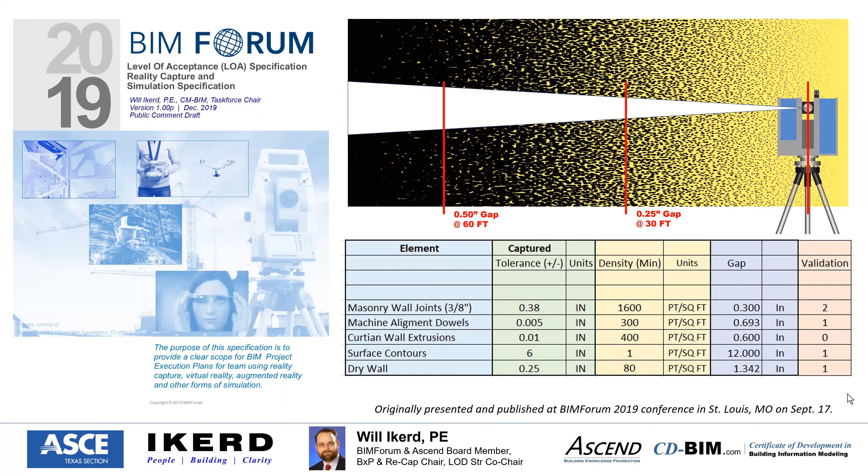When we look at reality capture, I want to mention that the perspective of the specification is brought together both from those in design, in civil engineering, structural engineering, architecture, mechanical engineering, as well as those in construction. And some of the vice chairs on the committee with me would be Alan Sonoha with Turner Construction and Mark Epstein from Sundt Construction, as well as feedback from other national organizations.

When we look at the concepts of reality capture, you think of the adage where people would say you have to see it to believe it. And additionally, we've heard measure twice and cut once. And what we're going to see as this technology advances in the built environment is that projects using reality capture are going to continue to expand. The capabilities of reality capture will continue to grow, and the costs of deploying it will continue to decrease.

We've, at my firm, been utilizing this technology for over 10 years, and that's been consistent throughout that time period. We leveraged this technology from other industries such as aerospace and manufacturing and began to apply it to the built environment. And we have seen that the capabilities of the tools keep getting more advanced while the cost points for deploying that technology reduce.

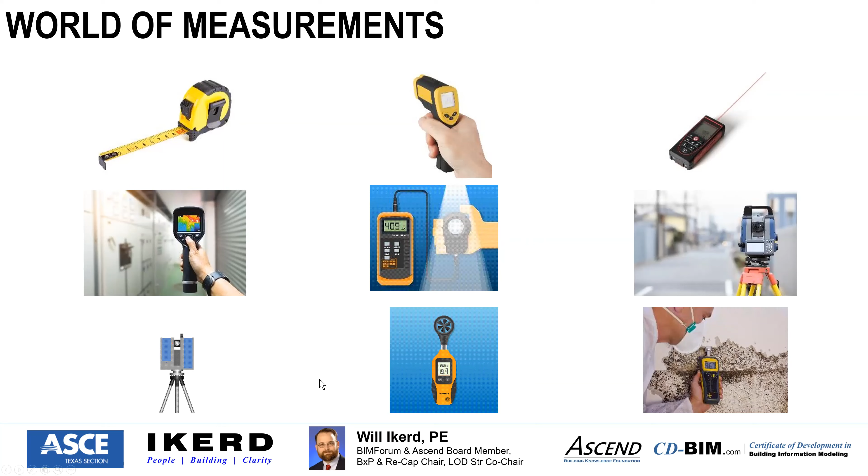Additionally, we want to think about large data. Reality capture is literally all around us. Some of you may already know this, but in the NFL, all of the major football stadiums have RFID tracking sensors around the upper decks throughout the stadium. And each player has a minimum of 2 RFID tag locators in their shoulder pads, one on the right, one on the left. Linemen have 3, one down lower in the spine of the pad.

It is taking over 180 billion bytes of data, real-time tracking, over 31 stadiums, 2,500 players. And they can not only know the speed of a runner, but the direction that this runner's shoulders are pointed. Each football has 2 of these tags in it. They not only know the velocity of the football, but they can tell you the spin of the football as it's looking at both of those tags inside the football and their spatial position as the football is thrown. And the volume of data is really kind of staggering when you think about it.

This is reality capture. And what I would submit to you is that the projects we work on are far more important than a game. And what we're going to see in the built environment, not today, maybe not tomorrow, but these volumes of data sets will be very, very common when we start to think of projects in the built environment, both of what we might call horizontal BIM or civil infrastructure type modeling, as well as the vertical environment of traditional buildings that we might think of.

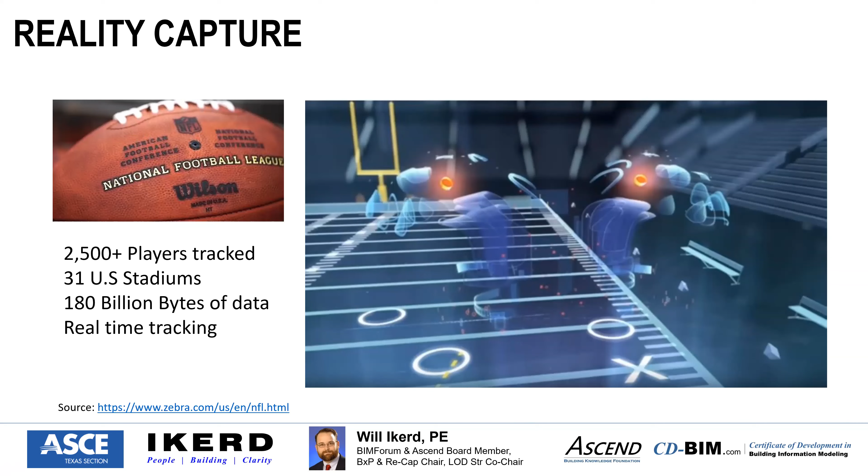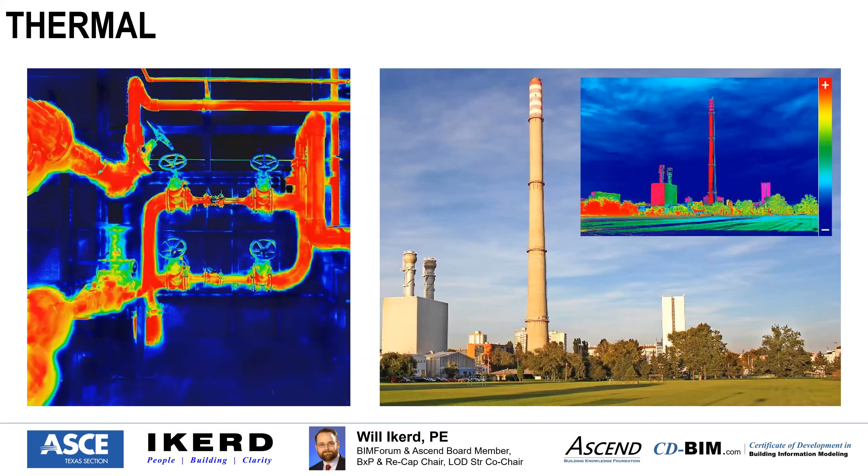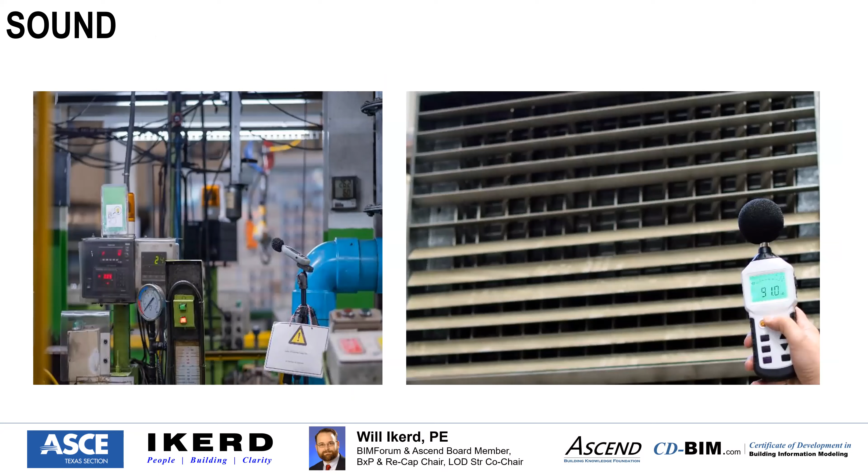Thermal and imagery. This is another aspect of reality capture. And one of the things we're going to talk about in the spec of reality capture is this concept of density of measurements. But you could see definitely in the industrial industry where this could become important. Sound measurements. This could be very important if you're doing a road expansion near an area where you're considering sound pollution and how you attenuate those kind of conditions. That's reality capture. Obviously, we think from civil and surveying the concepts of spatial reality capture.

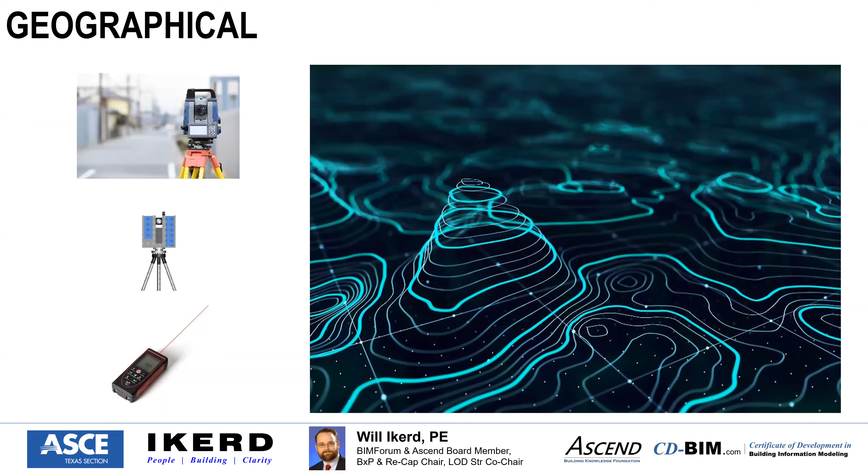And this leads us to where we bring in the concepts of density. One of the things that we look at is that I like to use this analogy of spray paint. When we're thinking about our measurements of reality capture, these could be seismicity measurements. How often do I need sensors in taking those measurements? It could be a robotic total station with a single point and shooting those at distinct areas. Okay, those are going to be points in space.

It could be laser scanning in the cases, examples I'm about to talk about, where I'm shooting up to 1 million points a second. But the question is, what is the density of measurements I need to achieve the goal? And it's not always good to pile in a lot of additional measurements and create a lot of additional points if the file sizes begin to get large and unwieldy. And so we as teams working with owners need to start having this discussion. What are the right amount of measurements?

I have seen some teams try to take laser scanning equipment and create topo surfaces from it. And then what happens is, as they begin to process the data, they start to realize the densities of these point clouds are so thick that they need to do a lot of point reduction to get a TIN network that's even reasonable to work with. The file sizes are really unwieldy. And while they are arguably more precise, I could be the devil's advocate and tell you they're not more accurate. There is this dichotomy and tension between precision and accuracy.

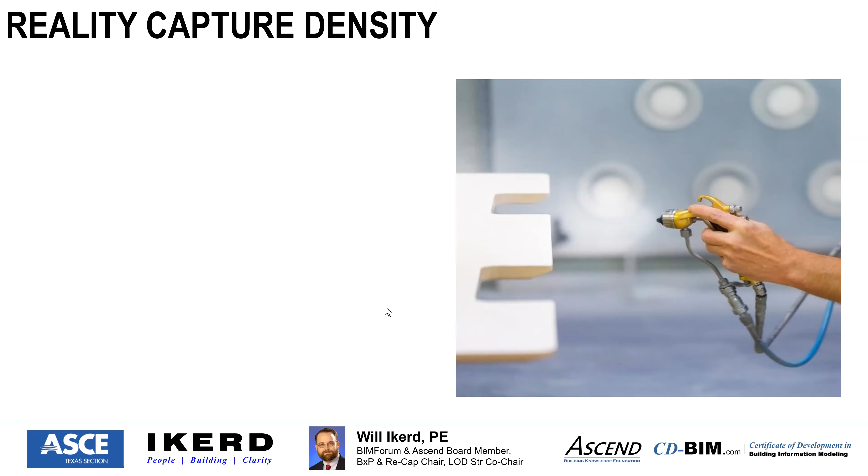So just as if I was spray painting, it wouldn't be a good idea to put on 10 times as much paint as is needed. It would look messy, it would create a mess, and it would be very expensive and wasteful. So just like this spray paint analogy, you don't want less than you need, but you don't want more than you need. And we as professionals need to understand these technologies, understand what reality we are seeking to capture, and going on from there. So as we look at this concept of densities, I want us to think in this case,

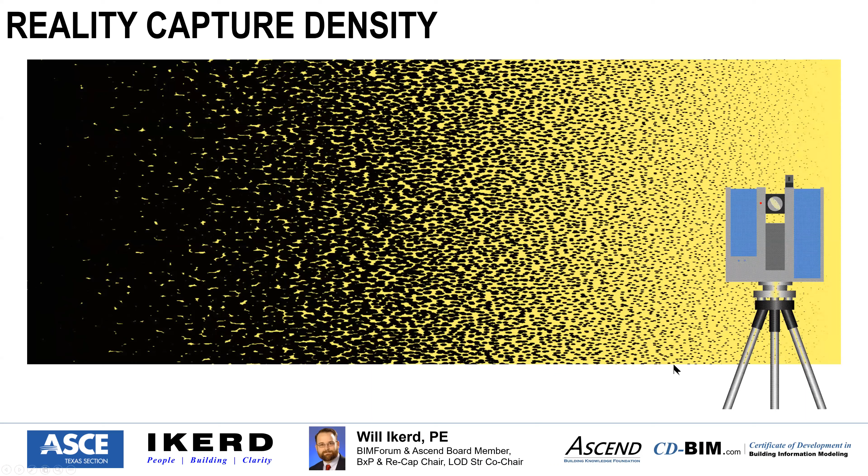light detection and ranging, LiDAR type scanners, and they're going to shoot points out. And what you'll have reported from the manufacturer, some manufacturers will report scan time, some will report densities, and they will report a gap spacing or a point spacing. Depending on the manufacturer, they're going to dictate how they determine that. In this example, I'm saying assume that the manufacturer told you you have a 0.25 inch gap at 30 feet. It's linearly proportional. As you go out to 60 feet, you're going to have a half inch gap.

And what I want y'all to be thinking about is that there's not any setting on the equipment that'll tell you this is your density. They will tell you your overall scan resolution, and that's going to tell you how many points it will shoot out in a certain gap at a given distance. If your object is 15 feet away, then your gap spacing would be 1/8 of an inch. If it's 120 feet away, your gap spacing would be 1 inch. It's linearly proportional. So if I'm trying to measure objects that are very far off, I'm going to have to shoot at a much higher density than if those objects are very close.

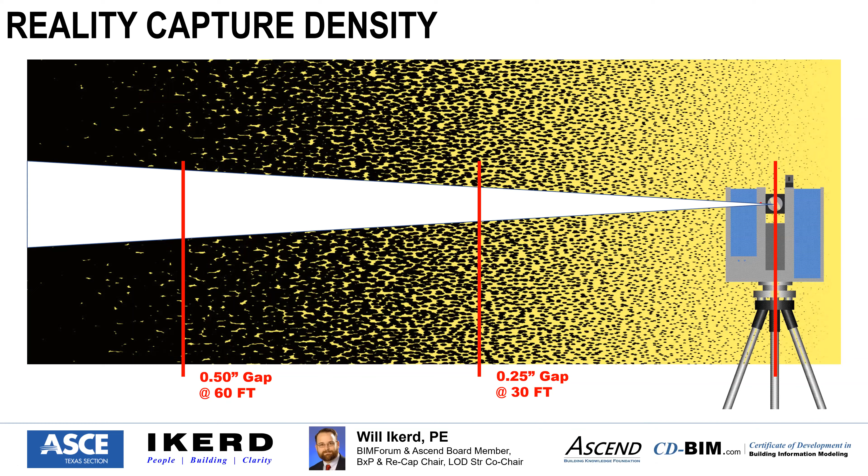So part of the discernment and the engineering that go into prescribing the correct amount of scanning needed for a given task is really understanding this concept of density. What I like about the BIMForum's reality capture specification that deals with levels of acceptance is it goes beyond just accuracy. It's not good enough to read out the accuracy of the instrument. You need to start considering the densities.

If this was other forms of reality capture, you could see this correlation between the accuracy and the units of measurement and the density of those measurements. And you could see this table would vary a lot. In all the examples from here on, we're going to hone in the discussions on laser scanning, but these concepts would apply to other forms of units of measurement for different types of reality capture.

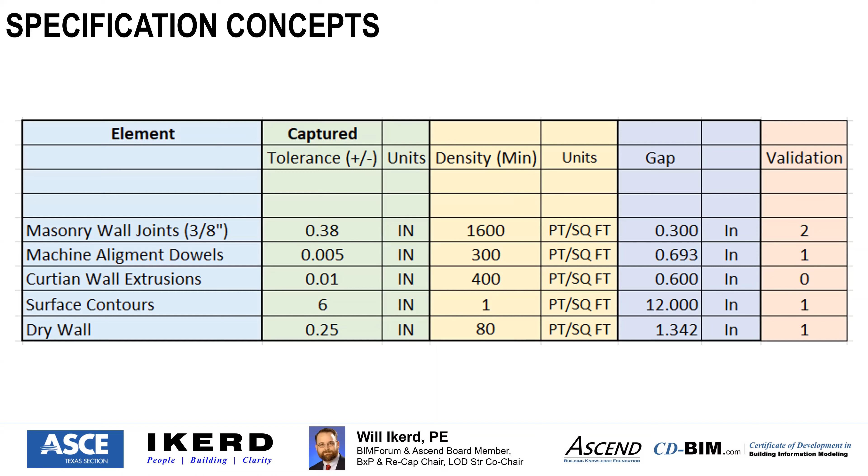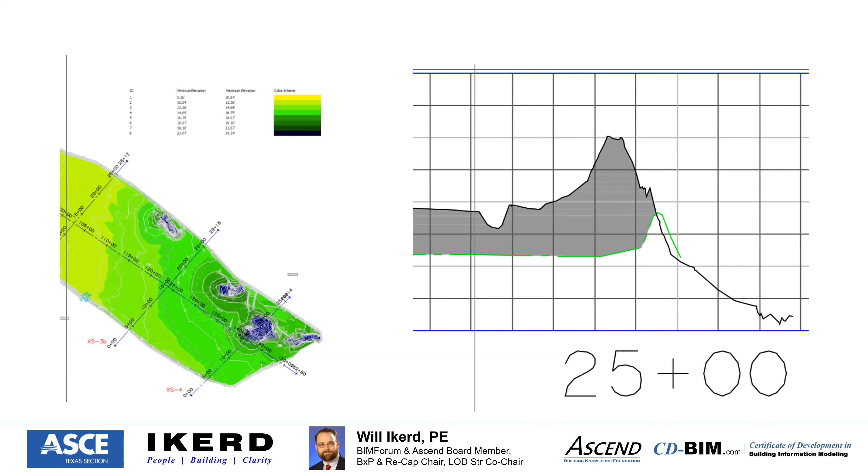So there's not one size fits all. And there's a lot of factors that go into the tolerances. And so we need to start looking at what is the right amount of measurements. In this particular application, the aerial drone created a very dense mesh that had to go through subsequent rounds of mesh thinning, which was deemed acceptable to average out the file size where it was reasonably manageable. I think meshes were opened up to the nearest 3 foot or 1 yard intervals between points.

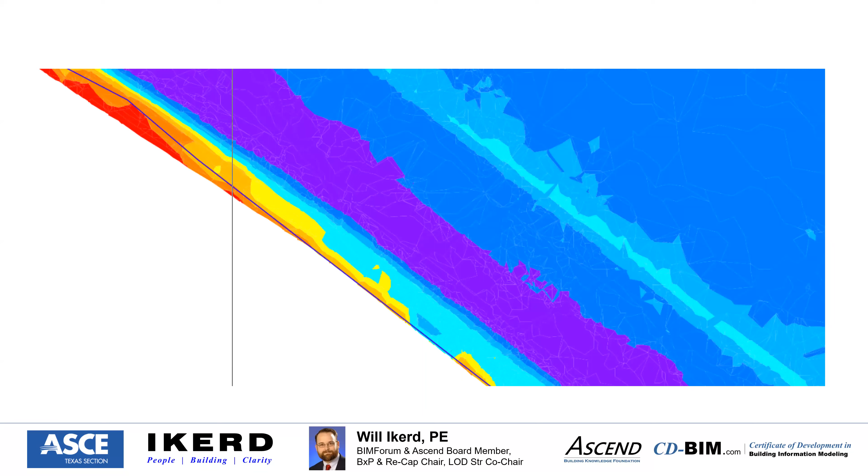And what you do at that point is you're tracking the volumes as you make adjustments of that mesh, and you really are looking at how much the volumes are changing as you start refining or thinning the mesh on that calculation. So in this particular objective, one of the things we deal with in photogrammetry is if there's thick shrubs or other artifacts on the surfaces, that technology can pick up those objects and it will skew the data. So there can be work involved in making discerning decisions about what of that geometry to leave out when it's creating that mesh.

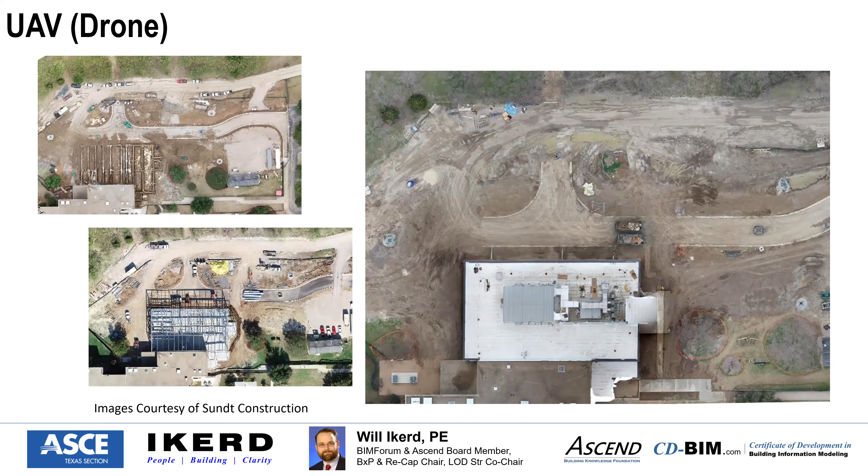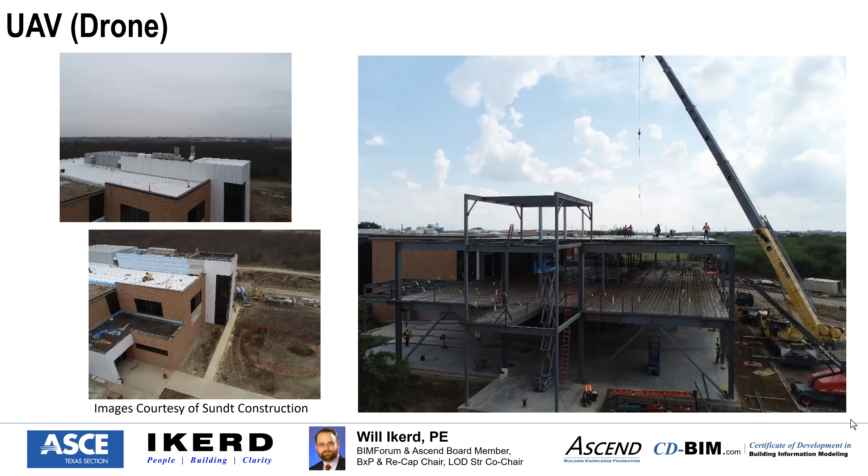With each of these, if you're looking at this presentation, you really need to consult the particular manufacturer specifications on the equipment you're using, and also consider every year that this technology is evolving. But with that said, here the aerial reality capture provides you a good understanding of the status of the project, and that was its function. And so here you would really put densities not applicable. You're not very concerned with densities if you're calling out this type of measurements as you go.

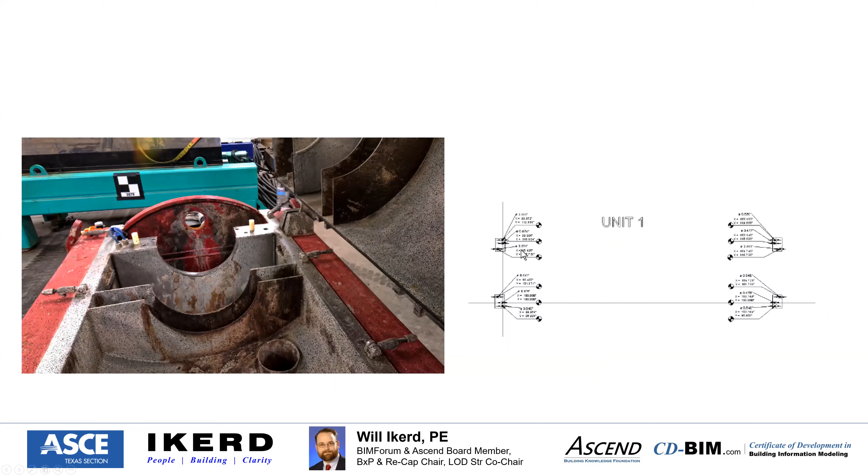These are Delrin machined pins we put in. They show up in the laser scans, but they act as a wayfinder in the models where we will auto detect that sphere that's set into the setting pin socket. Those were machined on a lathe to match fit the sockets of the setting pins. Here you would see spheres used for triangulating and auto-detecting separate scans, and checkerboards are placed in the distances that are also used to tie together separate scans. And here on the back side of the centrifuge, you would see other setting pins that are used to show up in the scan data and serve as a location aid. And from these, we would work out the brackets of where we would place these.

Moving into industrial applications, here you'd see a combination of a robotic total station and one of the laser scanners used in conjunction with each other. Spheres are used to pull these scans from different locations together, and the total station would be used to shoot in points and shoot faces of structural steel to act as a secondary calibration of the measurements.

In this case, this was a rail system used to transport jet engines for testing. And so we were dealing with not only tolerances of the structure, but tolerances of rail alignment as we study those. And the structure overall, in this case, we were doing both reality capture and structural review of the system to accommodate testing of larger jet engines. But these would be rolled on a carrier, just the jet engine itself, into the testing bays.

As we look at that, you see an overlay and synergy from modeling, which would be existing in green, new is in red, this would be an apparatus, and then the point cloud is overlaid with it, showing you the existing railways as they spin off the main and into each bay. So you see a combination of dealing with tolerances, but also we need sufficient densities. We're shooting from the ground very high up. So on this one, we would have had a tighter specification on scan densities.

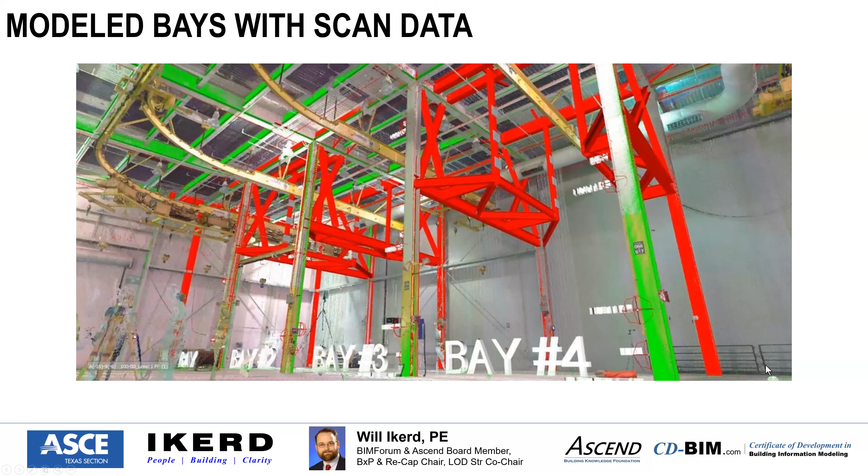Do the spheres have transmitters? Very good question. The spheres do not. They are a calibrated surface, and in some of these scan pictures I'm going to show you, you'll see a bald spot in the scan data. This is where it's directly below the tripod, and the scanner will scan everywhere except directly below itself. So it will scan almost 360 degrees. It'll do 280 degrees over the horizon and then 360 around, and it will pick up these spheres.

And it takes 3 spheres, 3 points to define a plane. We'd like to have more than 3 spheres in any one scan. So when I move the scanner to a new location, it will pick up the same spheres, and the software will be able to auto-detect those and tie those 2 scans together. If these spheres are on platforms that are vibrating, you will get error in your registration. If a technician accidentally bumps the sphere, you'll get error in your registration.

If they're outside and you're in conditions where thermal expansion is a consideration. For example, there's a really long run on a rail line, and we put one of these spheres on the magnetic base. Let's say we were scanning within an area, and 2 of these spheres were each side of an expansion joint. It is conceivable that with thermal expansion, you could start to perceive some error as you're measuring with this equipment.

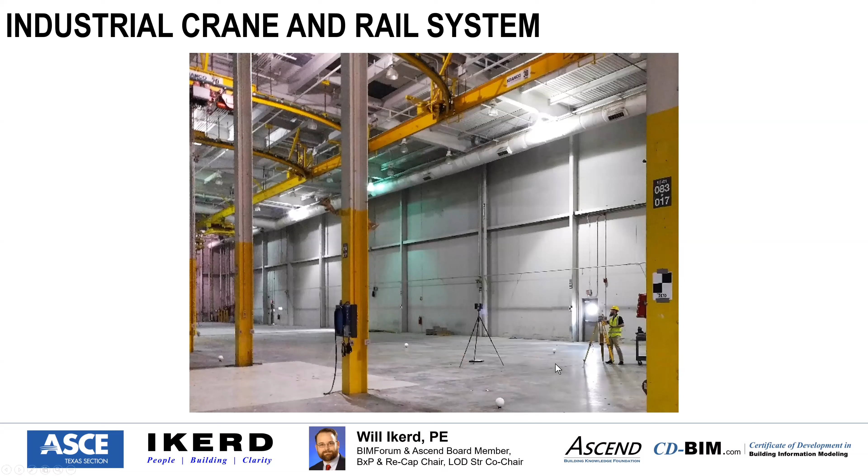As we look at another example, I'm going to shift. This was in Houston. The building's a little over 100 years old. On this one, I was requested to do load capacity calculations. It's approximately an 8-story building. And one of the things I'm looking at is that the steel columns were built up from plate girders. And then they would have large uneven-legged angles, and the long leg of the angle actually turned into a thickened portion of the flange the way it was riveted together.

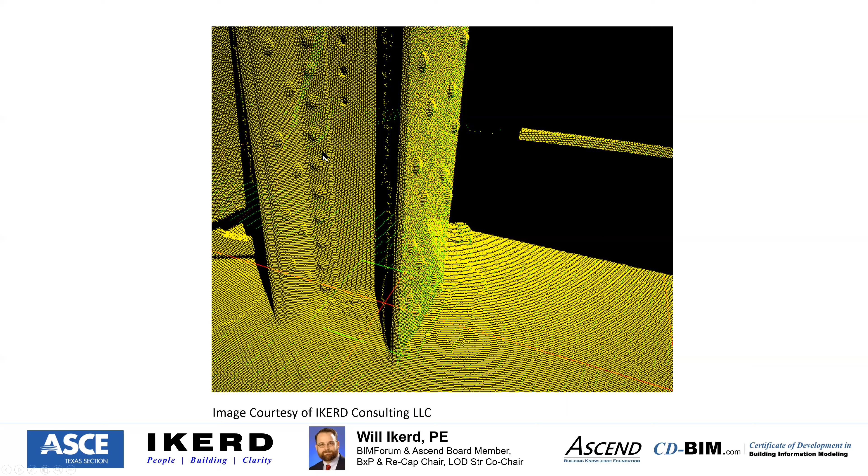So here I'm looking at much higher densities, very tight tolerances, and it does not need to be over the whole project. I'm really just looking at identifying the column locations and the capacities.

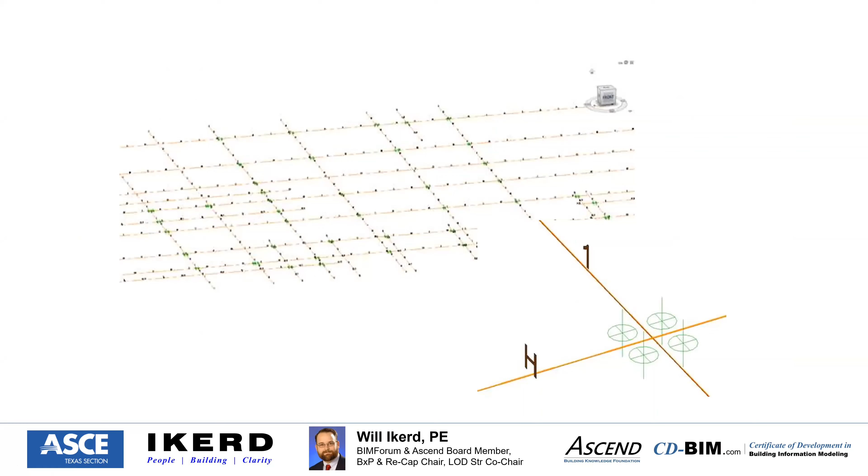So far we've gone through a 20 to 30-year-old jet engine repair shop, centrifuges. We've talked about 100-year-old buildings. This is new construction I'm about to show you. This was on a military base, and here it's been about 3 weeks. This is a pile of structural steel columns fabricated and delivered that they cannot erect. These are scan clouds, not photographs. And so these are point clouds of the space.

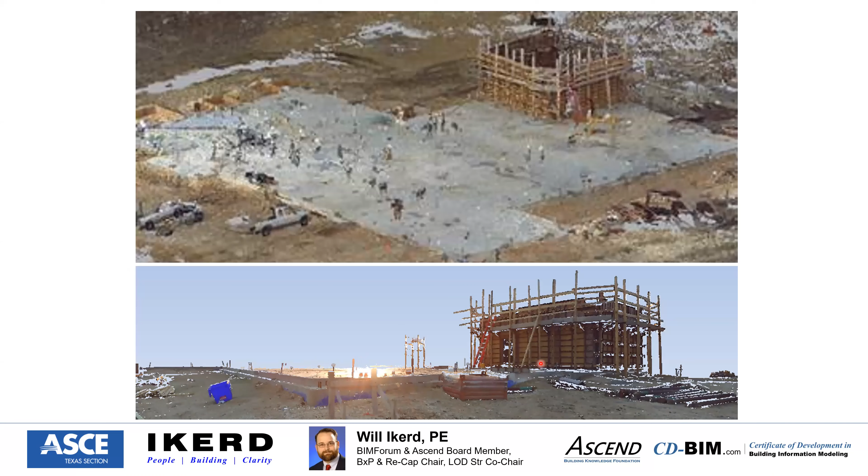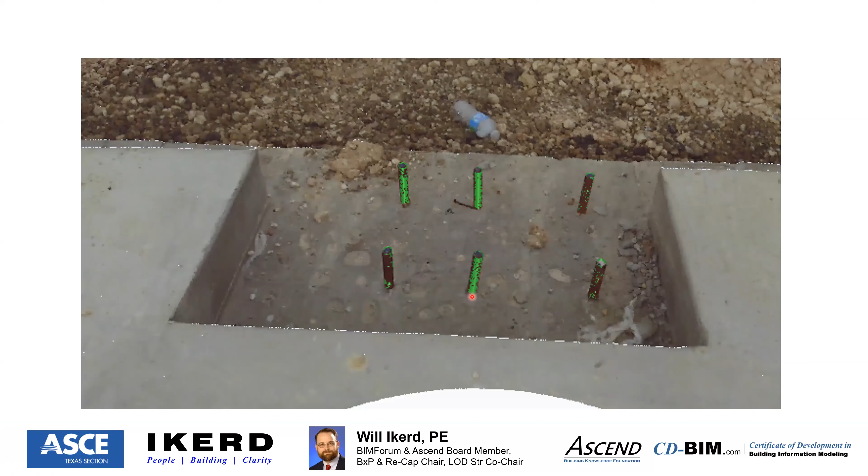Again, this is a point cloud showing the anchor rods. And the green is the auto detection in some extraction software where we're coming up with an as-built of the anchor rods. And so now you start to see the as-built of the anchor rods extracted.

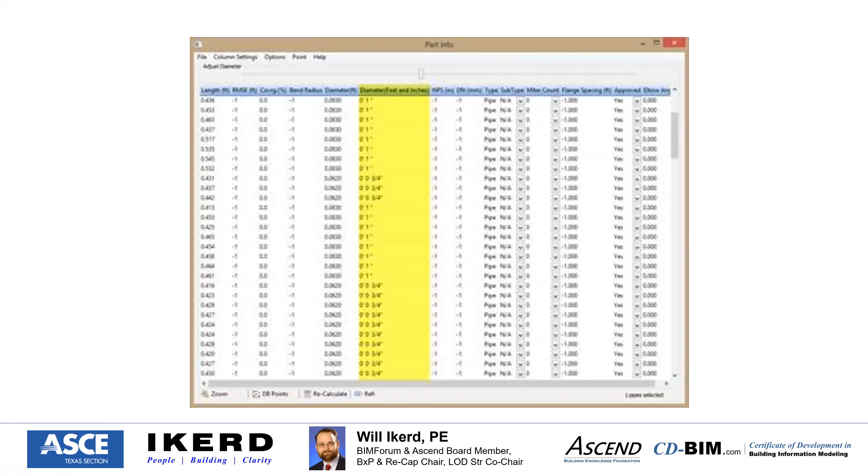And what we did is we calibrated a part library in the software. The software we used at the time of this project was utilized for auto detection of pipes for any mechanical type work. But an anchor rod to the software just looks like a pipe coming out. So we modified the library to look for the diameters that correlated to the anchor rods used on the project.

And what this allowed us to do is, looking at the pattern, we would look at the intersection of the crosses of a pair of anchor rods and say, by definition, that would be the center line of the grids.

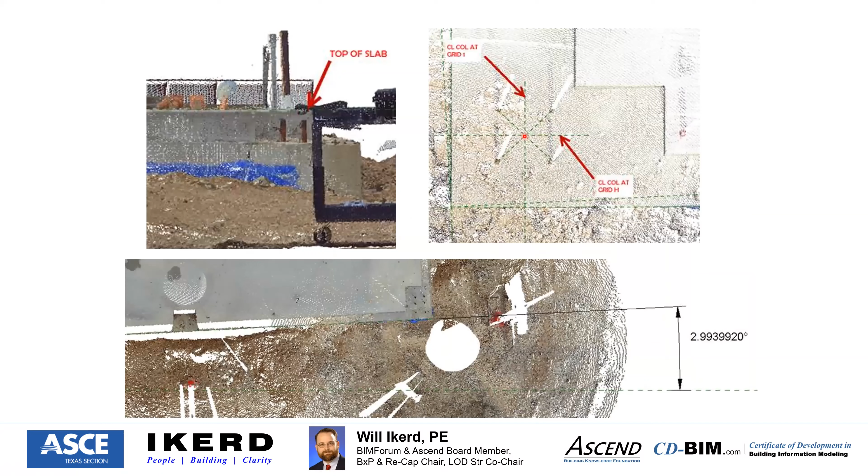And we located the point cloud into alignment with the grids, and then from there began measuring. And not only are some of the anchor rods off location, but they're also skewed. So it's not enough just to know where the top of the anchor rod is, that it's off center. You really have to know, is it rotated and tilting out of plane and out of alignment, i.e. are the rods not plumb? Because that's going to affect how you remedially modify the base plates.

In this case, we did scanning on a Saturday, had information registered, and a layout on Monday morning to review for the client. We also were retained to do the steel detailing modifications. We had remedial base plate templates provided to them by end of day Monday, and they were modifying steel Tuesday and Wednesday of that week. They got special permission from the owner to use plasma cutting on site. They'd previously, by contract, not been allowed to use torching on site.

But it took steel columns that had been sitting idle for 3 weeks, and they were looking at having to ship all of these columns back to the fabrication shop about 6 hours drive away. And reality capture allowed them, one, to understand what the problem was, and communicate it to the owner. Some of these locations were not only were anchor rods out of alignment, they were simply missing. They failed to install some of the anchor rods.

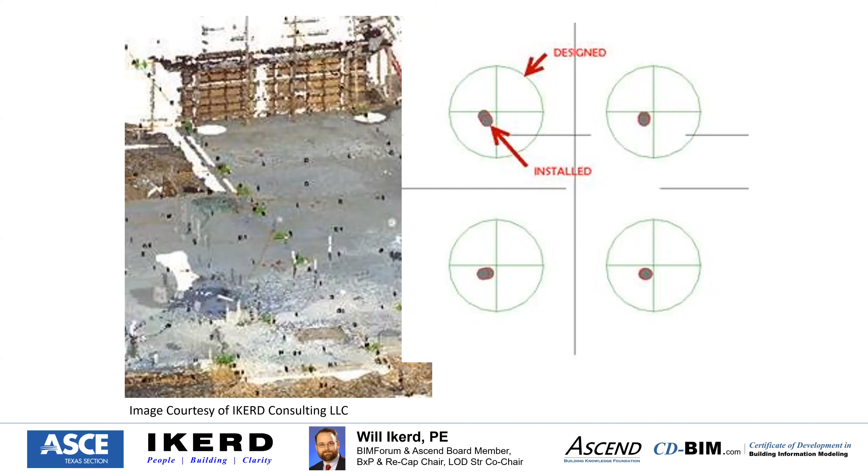So about 80% of the columns within 2 business days of scanning they were able to begin erecting again. But part of that was due to the fact they understood the existing conditions. When I say existing, the conditions as they were at the end of the concrete pour on this new construction.

Other forms of new construction that get into as-builting are post-tensioning. This is a project in El Paso, and this is a few years back. This is probably now 6 or 7 years ago. I believe it to be one of the first post-tension laser scans in the US. Our team was doing this on an elevated garage deck, and the developer had retail tenants that were coming in, but they hadn't sold out all of the unit spaces.

So some of these were high-end cosmetics retail facilities, and the owner knew that they were going to need to core this slab to support some of the tenant finish out of these facilities for electrical, etc. They didn't know what spaces the tenants were going to use. The tenants had not finished their interior design of the layout, and the concrete pours needed to go on. So the owner had us laser scan before each concrete pour, and these we did in color.

And this is where the discussion of densities comes into play. Typically up to the day before the pour, ironworkers are setting steel, electricians are laying conduit, they're blowing out the forms, and there's a lot of activities going on. And as I mentioned, if you're on platforms with vibration, you're going to have horizontal movements locked in because of the concrete columns poured below, which are already in place and cured, and formwork ties back to those. You don't see as much horizontal vibration as you do vertical vibration.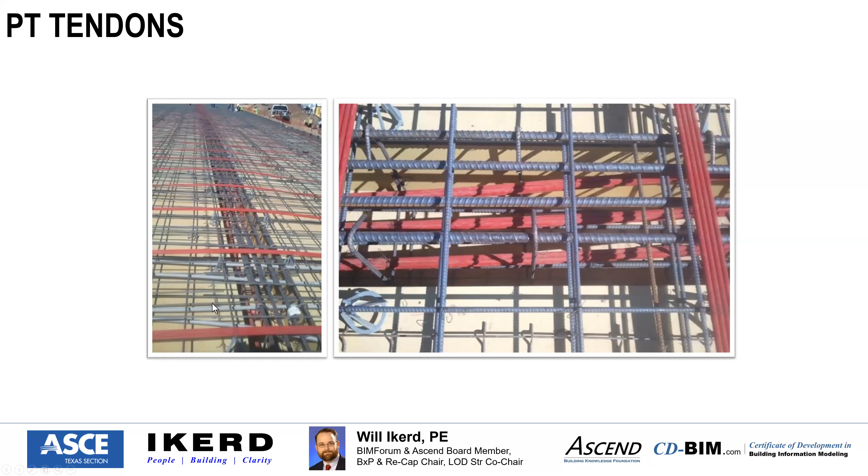Where that comes into play is you're going to see a lot of noise in this laser scan. That's because this formwork is vibrating. And the amount of noise you see vertically is going to be greater than the noise or fuzz you would see horizontally. Also, most post-tensioning cables are going to be, depending on the manufacturer, yellow, green, red, or blue. So this was why it necessitated the use of color scanning.

That helped facilitate making out the tendons versus the rebar. But you can start to see the bands. What was provided to the owner was a 2D map that showed band locations, and it did not matter to them that vertically there was more tolerance up and down on each tendon, because they were just looking at where do I core vertically through the slab?

And we were going to have them stay at least one slab thickness away from the tendons anyways. So since they were getting a horizontal 2D map, the fact that there was more noise in the measurements going up and down, and what I mean by noise, more variance due to the deck vibrating, was inconsequential in delivering the result they needed.

If it was important to articulate the tendon drape for structural calculations, what you would see is creating mounting apparatus that would tie into the rebar verticals, dowels, coming out of the concrete column. The theory is, in that condition, the concrete column is solid and separated, while the forms connect to it. The formwork should not be vibrating the column to the magnitude that the formwork itself is vibrating.

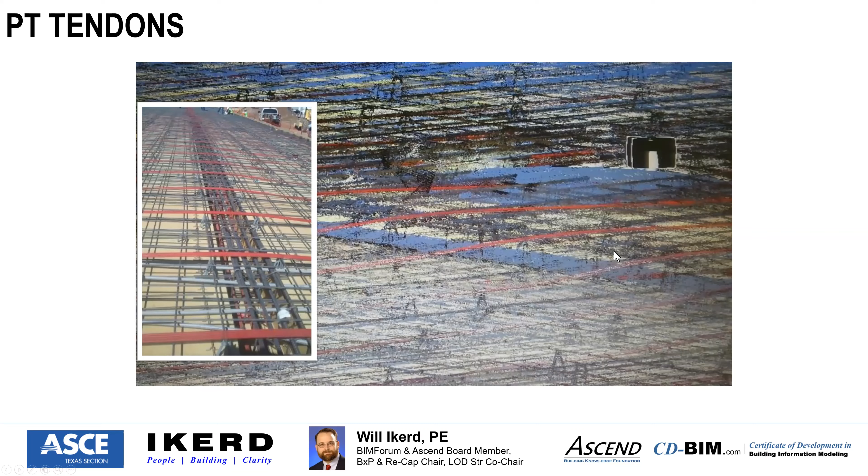And the rebar dowels would be coming up out of the concrete column, and you're going to be seeing dowels such as a number 8 or a number 9 bar, very stiff, and that would be a more substantial structural connection for the laser scanning equipment to attach to, but it would separate it from a tripod sitting on that form deck. The other thing you could look at is taking it off of the deck if you had sufficient space along the sides to do those measurements. It all depends on the tolerances you are trying to go for.

There was one property over on this side, a property here with about a $7 million house and a $12 million house. And they were going to demo all 3 of these, join the 3 properties, and just build one $60 million house. The goal here was they wanted the architecture to be very aggressive in how it morphed into the landscape and the trees around it. So our company was retained to do laser scanning of the 15 acres to document every tree. But they also wanted to know the tree canopies.

And so what you would see here is very high density, but just due to the nature of it, we captured at a much higher tolerance than was required, because we were modeling the trees as well and programmatically adding in information on tree growth. This was obtained through the arborist, who was also a consultant on the project. They wanted to look at, once we design the new house, how will it function over the next 20 years with these trees growing? So we got into mapping out root systems.

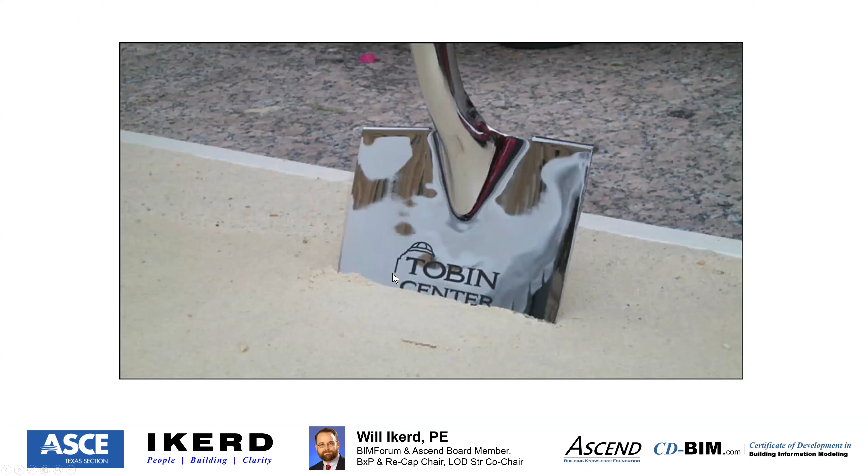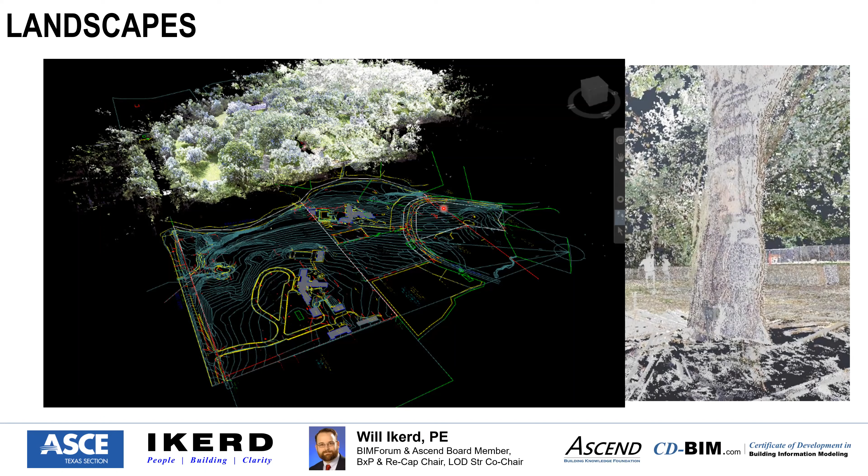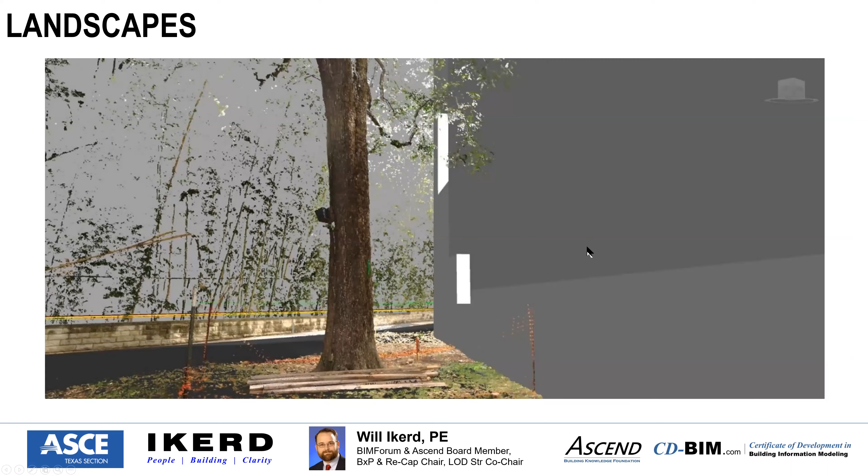If you're on a project like this and the owner is asking for consistent coloring, you have to have in your scope that you're probably going to have more days in the field, because if you're scanning at the hottest point of the day when the sun is right above you, you're going to get different coloration than you would in the early morning or late afternoon hours, and time of year. So this is another part of the scope that came up. Like I said, not everyday projects. The post-tension cable scanning and arboretum type work are ones where we're going to have to deal with time of day when doing the scanning.

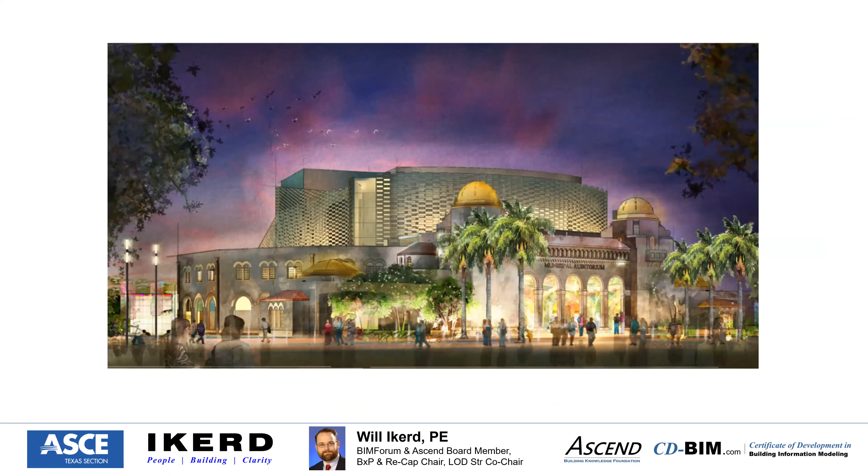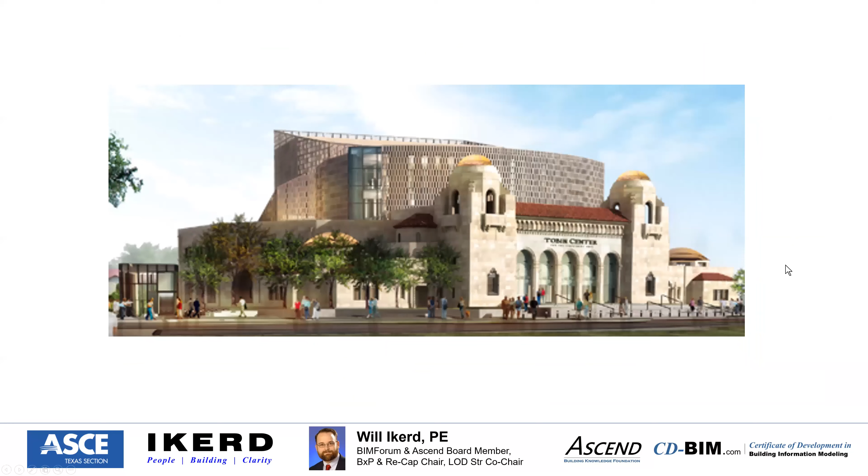This was a project in San Antonio. Some of you may be familiar with the Tobin Center. This was also a while back. We were on this project retained by Linbeck in a Linbeck Zachry venture, and Walter P. Moore was structural engineer on the project. And these just show renderings.

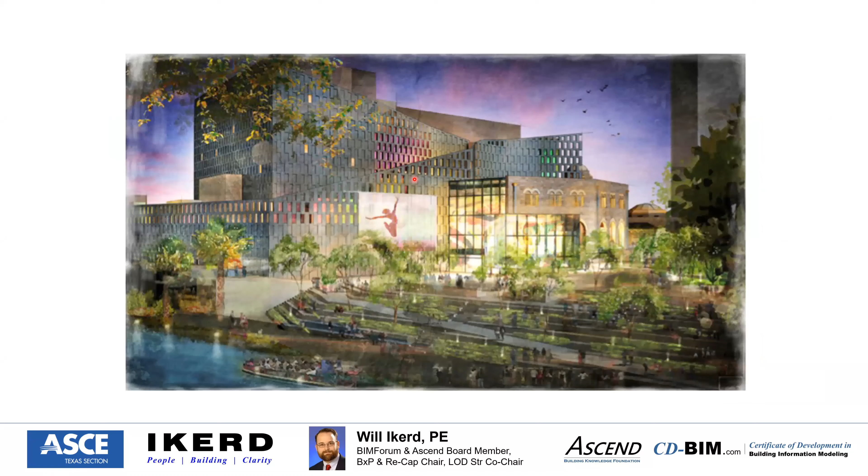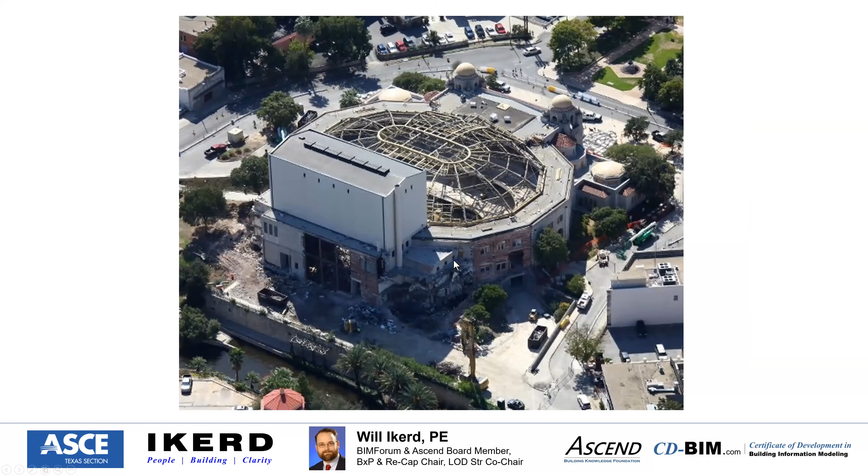This was approximately a $135 million new addition. And these would be renderings of what it would look like from the Riverwalk. One of the things we had to work with on civil here was tying in the state plane coordinates and control with the steel fabrication. So here we are at the Tobin Center, and these would be renderings of what we would expect to see with it as it went.

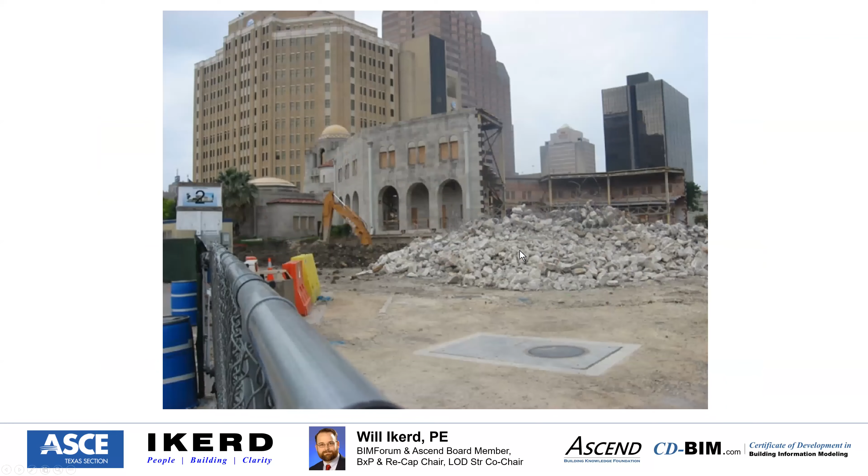And this was really what it looked like. As I drove up to the site, this is what it looked like from the front. And then as I went around, this is what it looked like in the back at the time AECO did its laser scanning here. Job site was rather tame at the time.

They were doing some testing for hazardous materials on some of the insulation and piping on the far limit, so they momentarily paused construction. This made it ideal for us to come in and scan in these areas where they didn't need to do testing. And as we looked at this, we had a couple of challenges here.

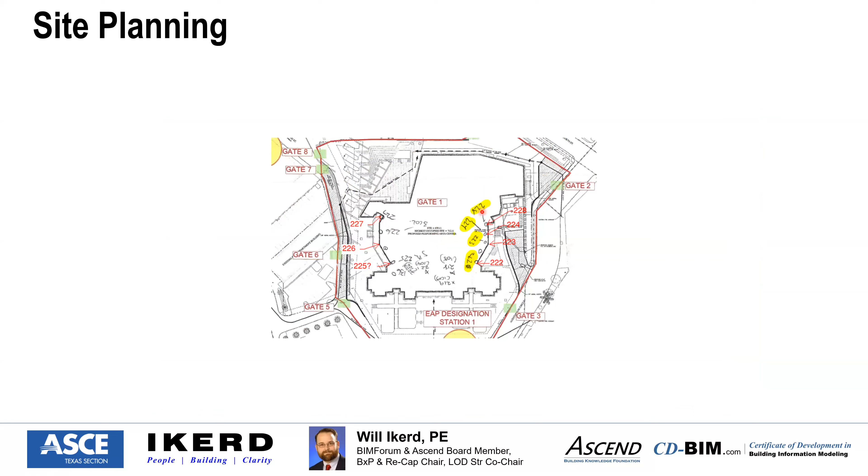The structural steel we needed to advise on was going to be tying into the existing steel structure, starting at what would be the first floor. There's a basement level below, and this would be a balcony level, and then an upper roof deck. So one of the things we would deal with is setting out targets and setting dimensional control. And these are what the checkerboard targets would look like as they're put here.

And one of the questions I'm getting from this is, can you vary the density of the points? And the answer to that is yes, you can set different densities. If you were to do sporting clays and you shot a shotgun, a certain shell that you put in the shotgun is going to shoot out a density pattern. But also you could either get closer to the target or further away from the target and adjust that density as well. And same with spray paint. You could get closer or further away.

So one of the ways you adjust density is you determine how far you move away from the object, and then you have some range of settings on the equipment itself where you can tell it to shoot higher density, lower density. Higher density, by adjusting the equipment itself, will take longer, and it's going to give you a much larger file size. And what you might find is you're better off taking more lower density scans closer to the objects you care about. And that could be drastically shorter field time, and more importantly, smaller file size.

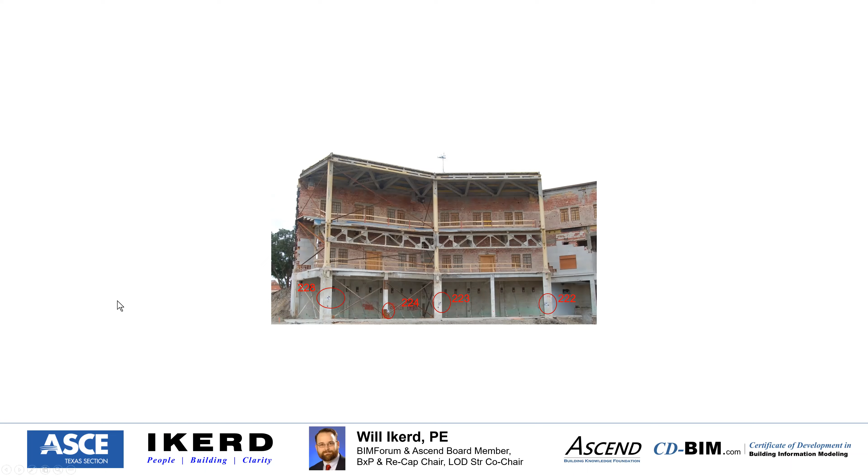By minimizing that file size, you're really going to save a lot of time, because for every hour in the field, you might have 1 or 2 hours back at the office on the software tying these scans together. And then you could have more time exporting it, and then it needs to get into the 3D modeling environment for someone to make a 3D model from, if they're going to do that.

And so if you have a 15-minute scan, at the very highest densities, that could be a 1-hour scan. It's not always better to just ramp up the scan density in the field. It might be better just to get close to the object with a lower density scan, get the densities you need in that area without really increasing your file size. Because even after you finish all that work, you still got to work with the point cloud, and we're talking about terabytes of data in some projects.

Currently, we have been retained for a project with the Department of Transportation where we're scanning millions and millions of square feet of their facilities over 100 sites, over 500 buildings, to create building information models of their existing assets. And we might be looking at well over 100 terabytes of data as we progress. We've done a football stadium in Louisiana that was 2 million square feet, and they're approaching terabytes of data.

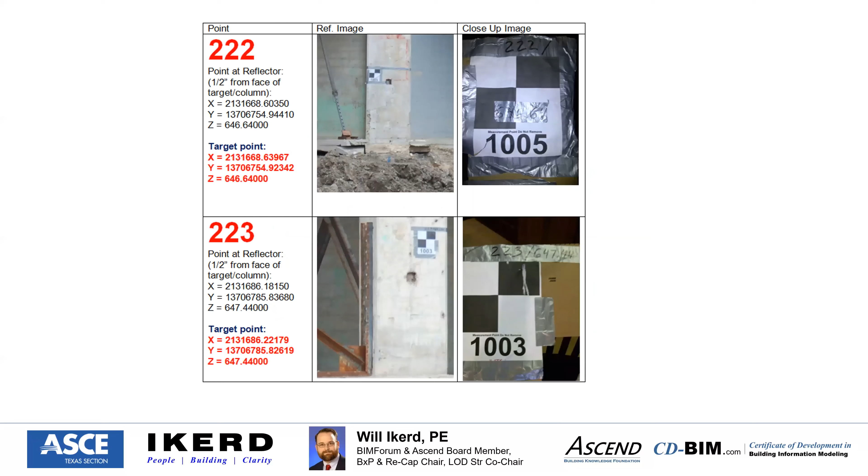We did over 1 million square feet in St. Louis for the VA hospital system. That one had 7 terabytes of data. And had we not been mindful of our settings, we could have gone to 10 to 14 terabytes of data. And these took a couple months to process. So you could really extend out your work if you're not careful. As we start to look at these targets and where they're located, you would see documenting what you were doing is important.

This is a 1928 structure, and you can see riveted columns. Concrete on this, we found some of the concrete columns were as much as 5.5 inches off center of the pedestal below them, which is rather remarkable. If you think about one of these columns taking 5.5 inches of eccentricity into its foundation pedestal and standing proud and tall for almost 100 years, it's really a testimony to the flexibility of structure in this.

The concrete work you see down here, you could tell it was rough sawn lumber. You could see all the grain patterns preserved in the concrete over the last 90, close to 100 years. This is the scan cloud from that. I can tell you where every grout joint is. I can tell you where the rough openings are in this. This is the temporary bracing to hold the structure in place as they were adding in the new additions.

And I'm reading questions as they roll in here. Does the software render from raster or vector? I'm going to keep this particular presentation software agnostic. There are really about 4 major platforms out there between Faro, Trimble, Leica and Topcon. What I would point out to you is that each of those are going to export out the point file, and they have different ways of rendering that information.

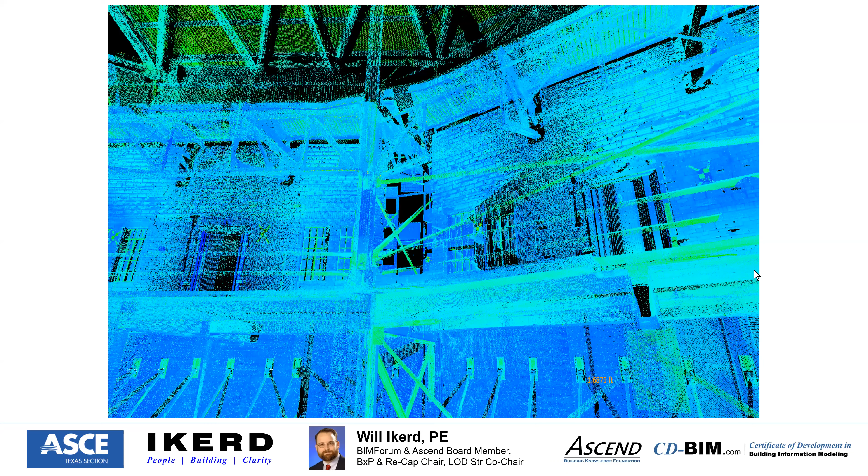The point files can also be made into a mesh, and then often that information is going to go into civil infrastructure software and building design authoring environments. Bentley and Autodesk and others, Trimble as well through Tekla, have modeling platforms that will read that information in. So between those, you're going to see a good variety of how they render that information. Needless to say, the point files are very large file sets.

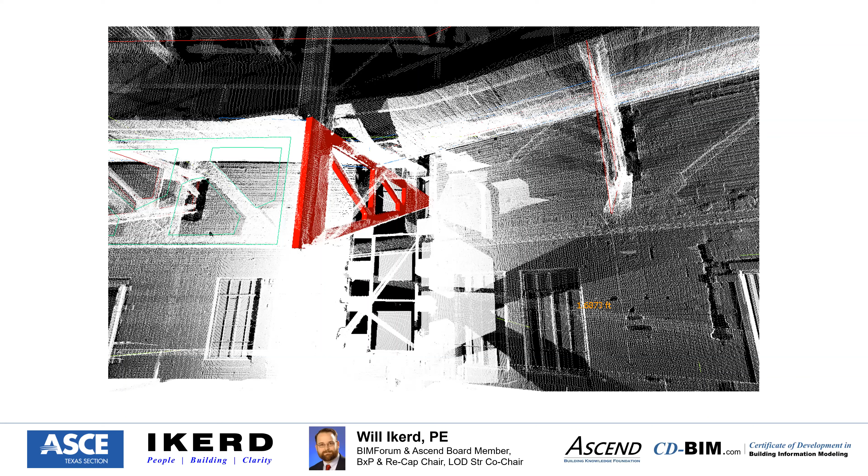Typically, when we're modeling for a building, we're going to be dealing in gigs of compressed data, and the raw files and the total file set would be hundreds of gigs, approaching terabytes, on a decent sized project. Here you can see there are bald spots in the scan data because we basically had access to 3 of the levels, so you see shadows up above. This technology is not X-ray; it cannot see through things.

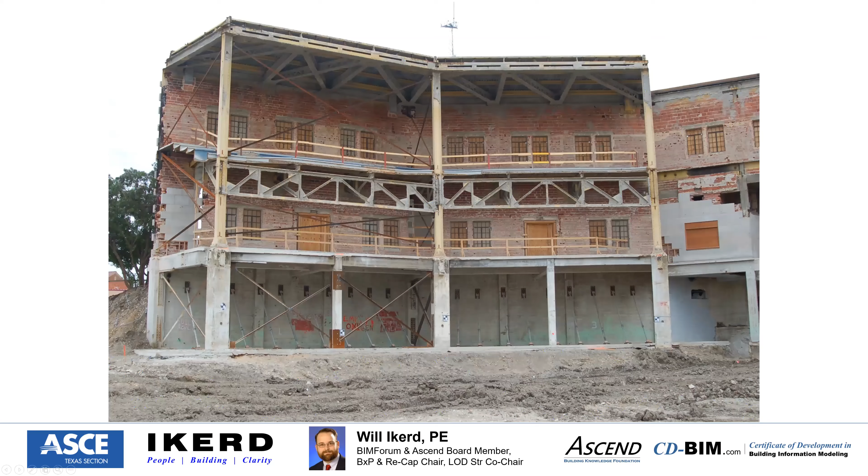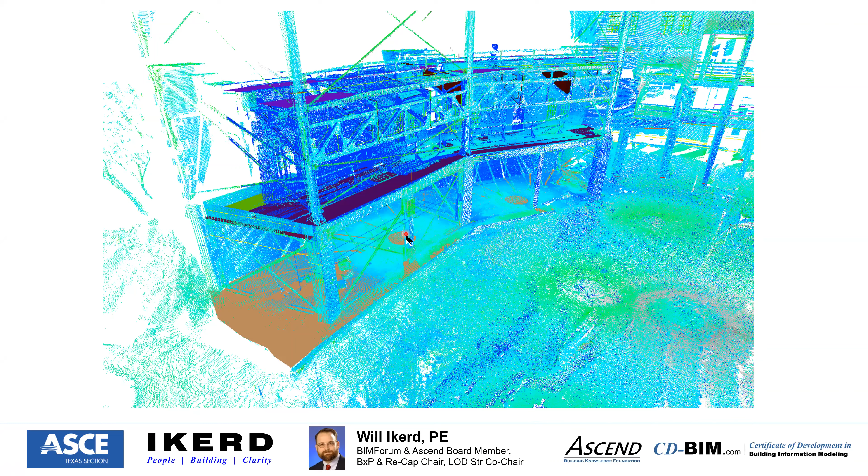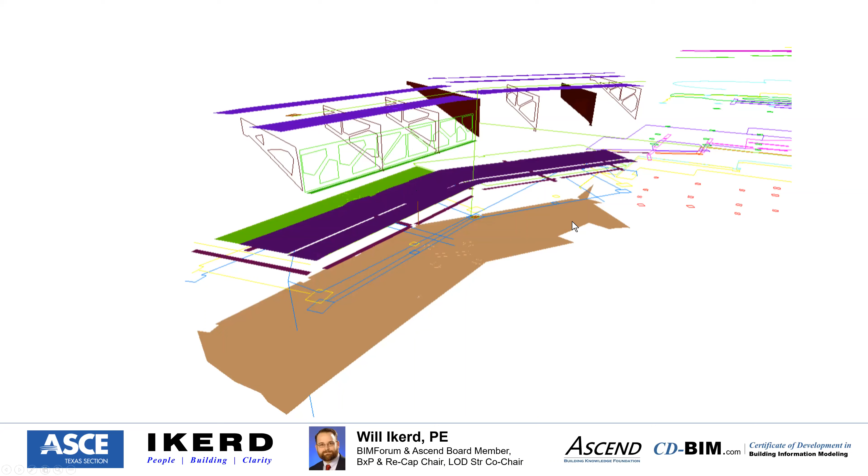Here you have the line work extracted out from the laser scan, mapping out where the structure is to create an as-built of the structure. To give you an order of magnitude, this is hundreds of kilobytes. It's CAD work with just line work. Gigabytes on the point cloud. Here I've taken 2 scans and left one in green, one in yellow, just to show you how you're coding different angles of the surface.

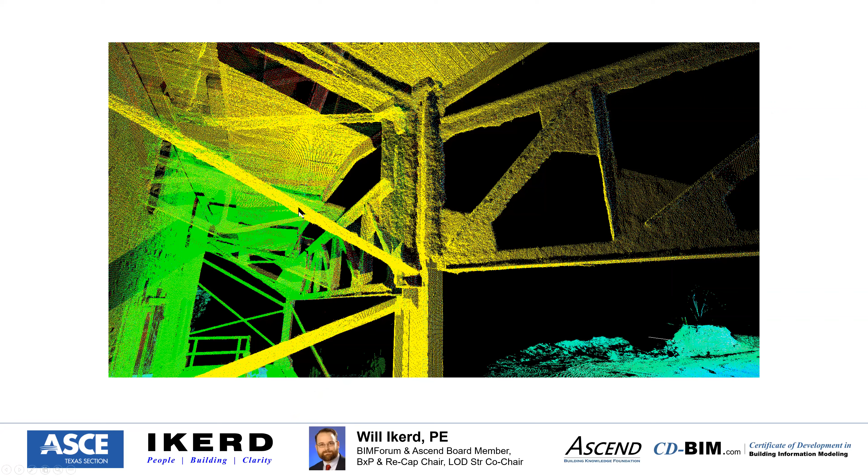Here you can see the line work extrapolated from those point clouds, and these are just projections, which created extrusions to make a 3D solid. When you overlay that 3D solid with the point clouds, you're going to see what we would consider a peppering. The scan cloud's capturing the real variation of the structure. The 3D model is an approximation of it to a given tolerance.

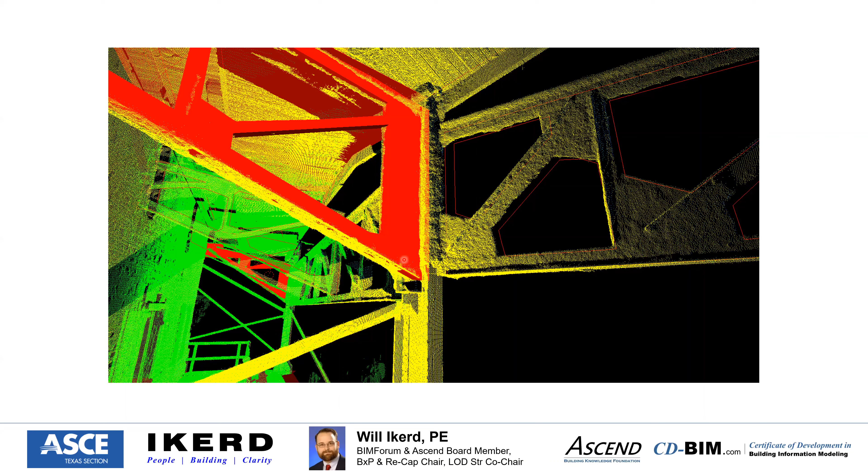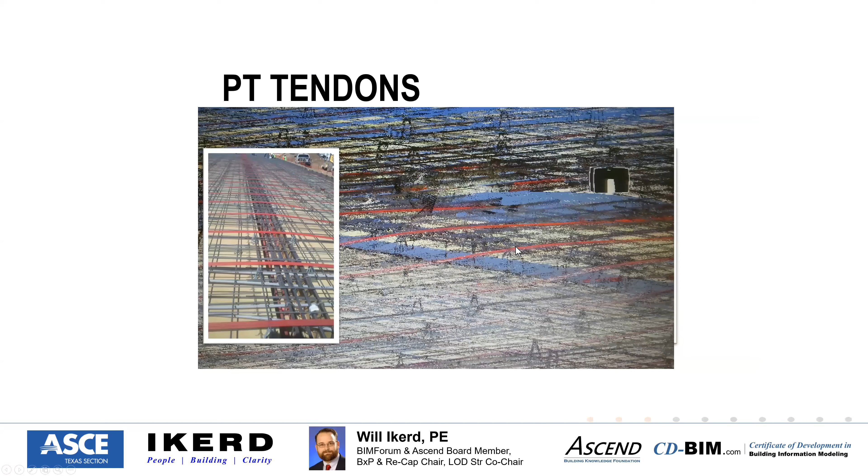That 3D model is very lightweight. It's very easy to use, and it's suitable for coordination of the mechanical, electrical, plumbing. But you can always go back to the point cloud for a feel of what's going on. We talked about the tendons. As we look at the PT tendon project, kind of going full circle, 100-year-old buildings, brand new construction, you'll see reality capture in all of these places.

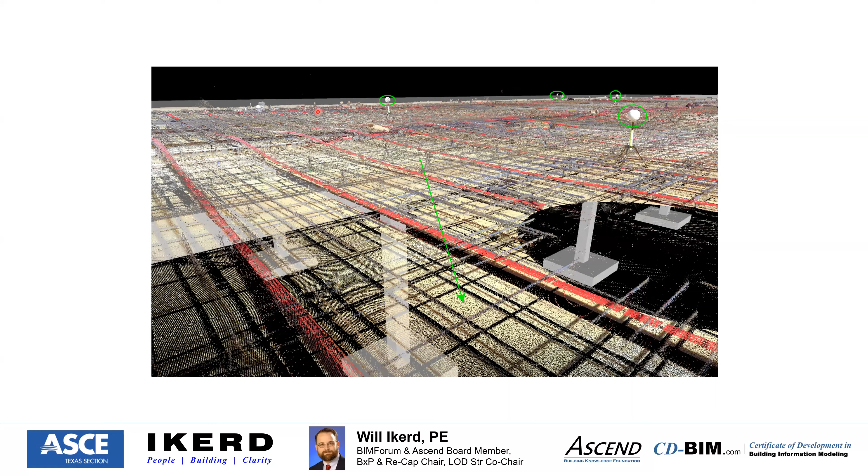You can see these circles where tripods were moved along. So the tripod was set here. You can see each tendon, and that gives you a feel for what's going on. These are the spheres that were used to triangulate and lock different scans together. This valley is where one of the girders was.

Put this in for fun. This was a client based in Germany that had contacted us, and we were doing, for all their initial deployments in the US, scanning of indoor putting greens. Different application, different tolerances, different resolutions needed. These are putting greens that contour, and they've got pneumatic controls and/or electric controls with risers about every foot, and they vary the slopes and contour of the putting green programmatically.

And then they have a projector, so currently these are used indoors, and it will project the path of the ball, and it's for training purposes. Well, they needed to know the contour configurations to put it into their software to work out the algorithms to show these projection paths. This is another application where we're dealing with actually thinning the mesh once we achieve it.

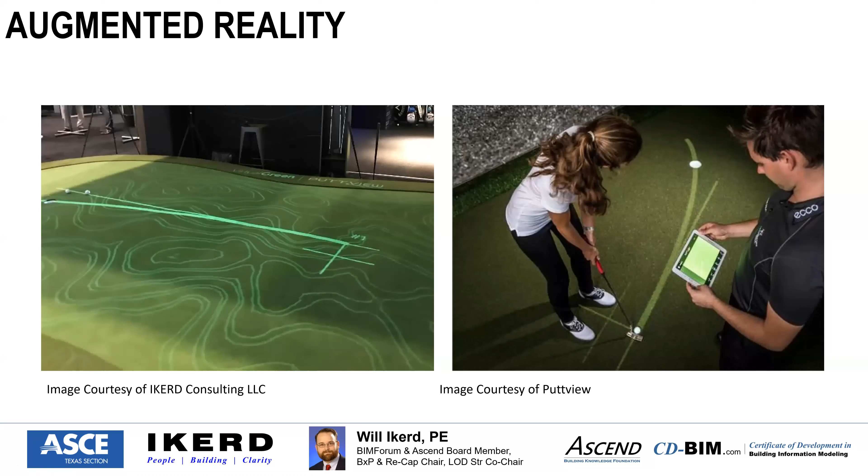But what I threw this in here for is just an example of the variety of reality capture and how it is all around you. If you go to a shopping mall, a sporting event, a built environment, if you're going down the highway, reality capture is all around us. It's growing. And for us to be competent professional engineers and really extend what we're capable of, we need to pay attention to reality capture and the corollary of augmented reality, where we're going to start seeing projections of systems and both virtual and augmented reality growing.

With that, I would note that reality capture goes very far beyond simple geometric data. A lot of the examples today focused on laser scanning, but as professional engineers, I want us to keep an open mind. This is seismology, it's sound, it's light. Any form of reality capture would fall into this, where we would get in the specifications.

Traffic counts is a form of reality capture, and you're going to see a convergence of 3D model geometry, what we'd call 4D modeling, where we're working in schedule, and 5D, where we're talking about estimating. And you're going to start seeing an overlap of people talking about reality capture as it looks at these different forms of data that are giving you snapshots of reality. Because some forensics modeling is starting to look at really the cost aspect, and that's one of the realities of the project that are getting tied back to reality capture.

So I would pay attention to the BIMForum's reality capture specification. It is meant to lay the groundwork to really have a specification that you could expand as a professional engineer on yours.